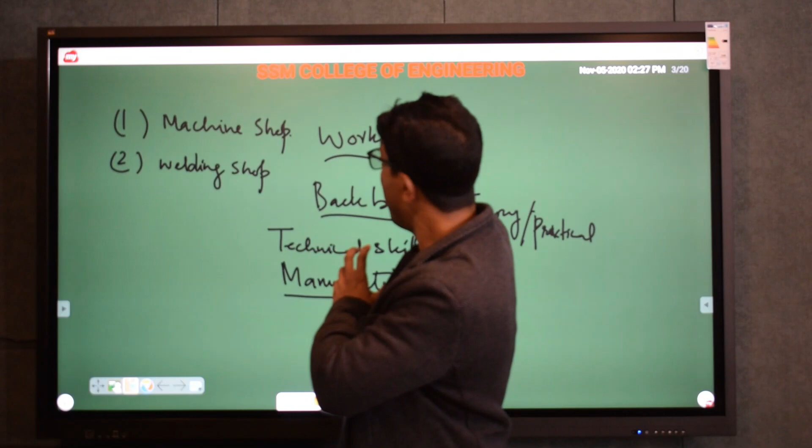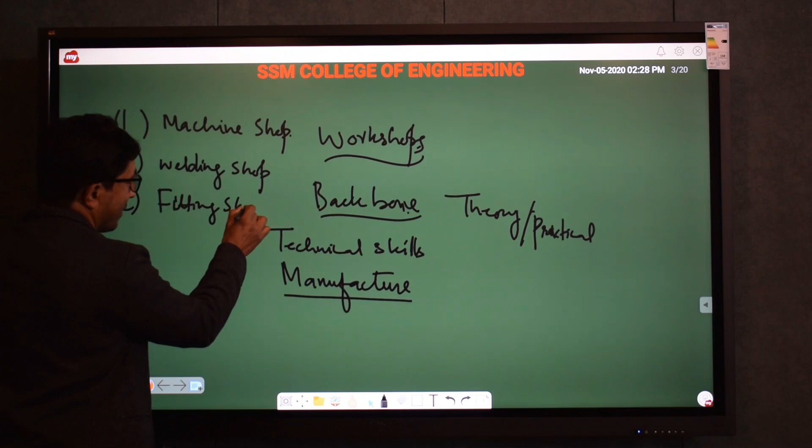Now let's talk about the third one, that is fitting shop. My dear students, remember one thing, when you come to engineering, the first interaction which you have about engineering is the workshops. So you will find this shop interesting, you will love to do these things.

In fitting shop, you use different kinds of hand tools with a metal to shape them, to fit them with one another. You do not only learn how to use these tools, but besides that, you learn how to measure, which is one of the important aspects of engineering.

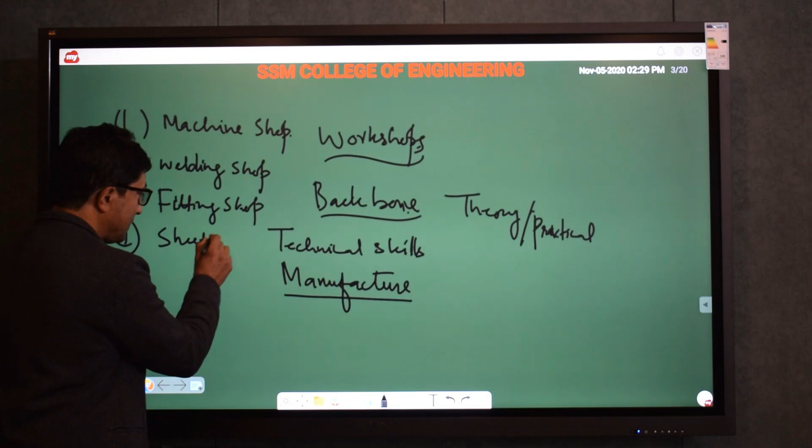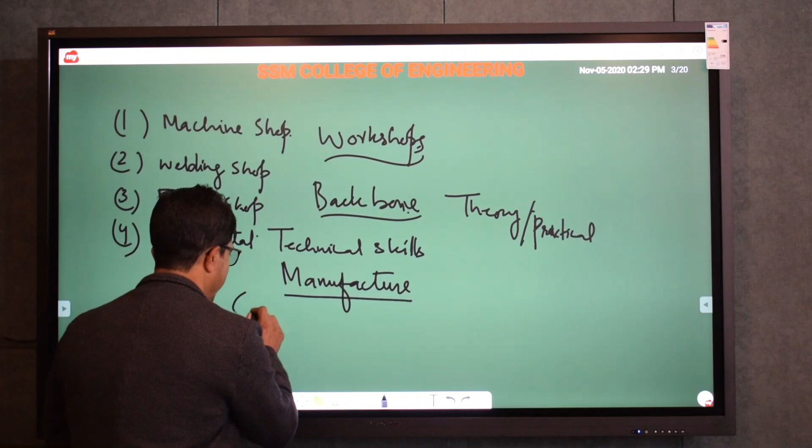Now, one more shop which is very important, that is sheet metal shop. This is also one of the interesting shops where you learn how to make different types of articles by using GI sheets, galvanized iron sheets. You produce an article using a material that is a galvanized iron sheet, and you use different types of tools, though not the same type of tools you use in fitting.

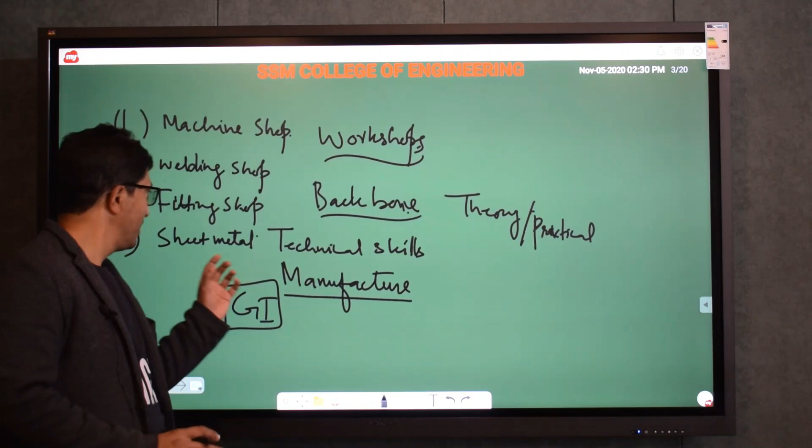And there is one more important thing in sheet metal shop: you use a concept that is used in drawing, that is called development. So you unwrap the article and then you make an article with that. A beautiful shop where you do not only use the tools, but you also use your imagination. You develop your imagination.

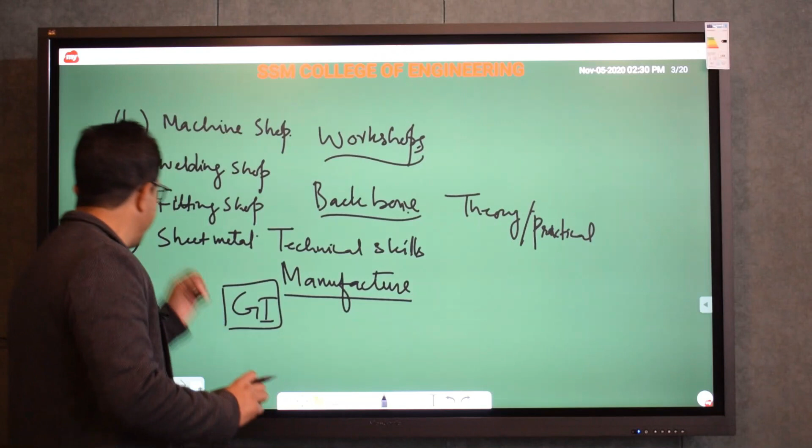Let's talk about one more shop, that is foundry shop. Foundry shop is also called casting. Have you ever heard about the word casting, students? In casting, we manufacture by liquidifying the metal into the liquid state, and that liquid metal is being poured into a cavity. That cavity is called mold cavity. And that liquidified metal, when it solidifies, we get a cast.

So that is what you are going to learn in first year of engineering, how we can bring the metal into the liquid state and how we can make beautiful objects with that liquid metal by using different kinds of patterns. I will not elaborate right now in this single lecture; I will talk about those things in future lectures.

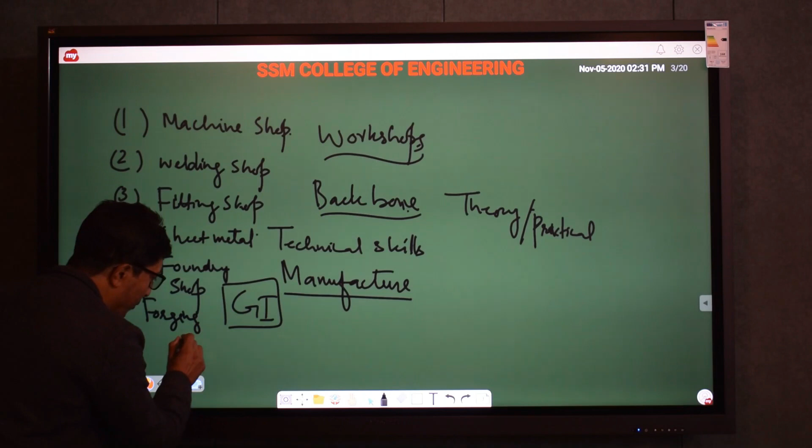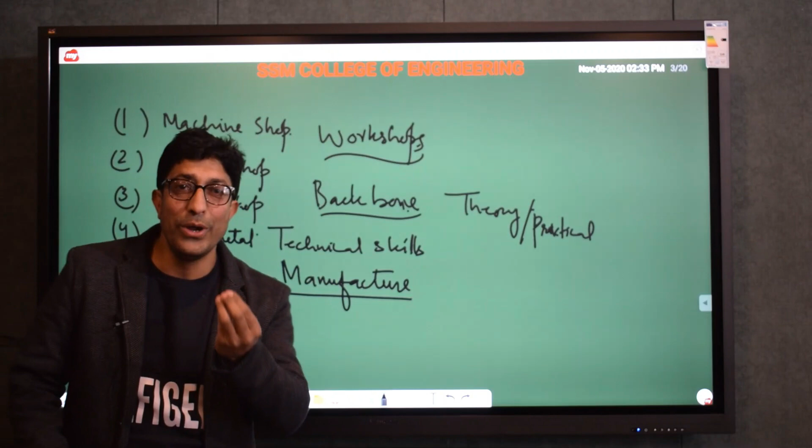The next important shop is forging, which we even call smithy shop, and in day-to-day language we call it a blacksmith shop. In blacksmith shop, we use deformative force to give shape to the product that is made of metal or some other materials. We bring the metal into the red hot condition, then we use deformative force to give it the desired shape and size.

Again, we use different kinds of materials or tools, like the anvil or the sledgehammer, or different kinds of hammers and tongs to hold the hot specimen.

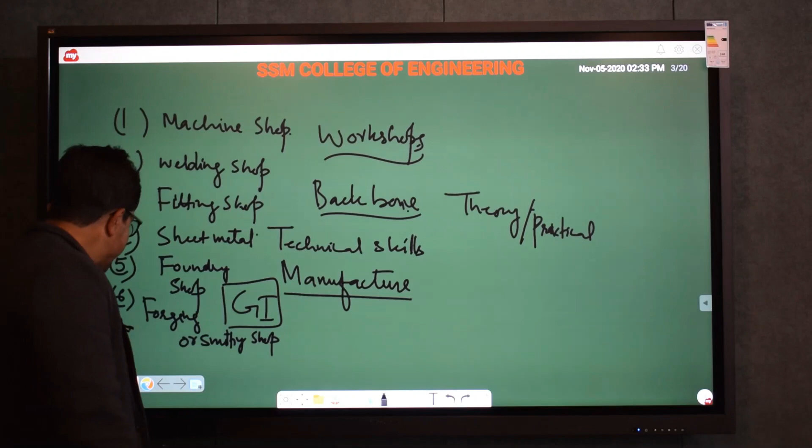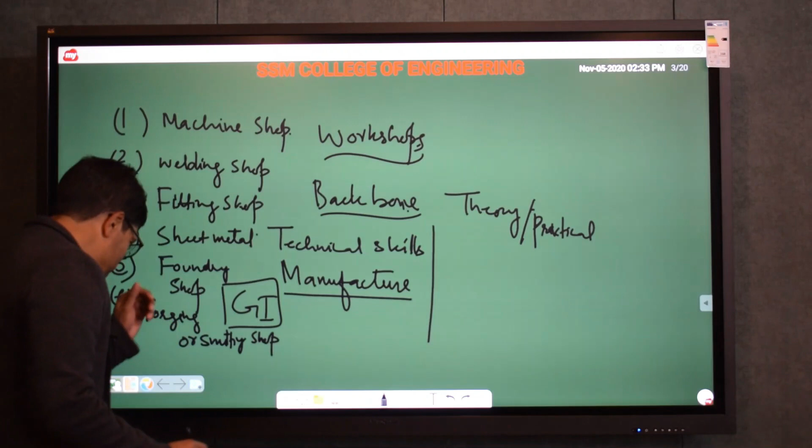My dear students, as I say, there are different types of shops. One more important shop among them, we call that carpentry or pattern making shop.

In different shops you have seen, we use metallic materials. But in this shop, the material which we use is wood. So we teach the students how to make use of different tools to give shape to the wood, or the timber rather we should say. We teach students the measurement, how you can measure, how you can cut, and how you can finish the timber to make different types of joints which we use in joinery.

So this is the introduction of the workshops. As I said, it is shops, not the shop. So I just give the gist of the introduction of the various types of shops which we are going to teach you in first year of engineering, and later on in mechanical these shops are being taught in depth.